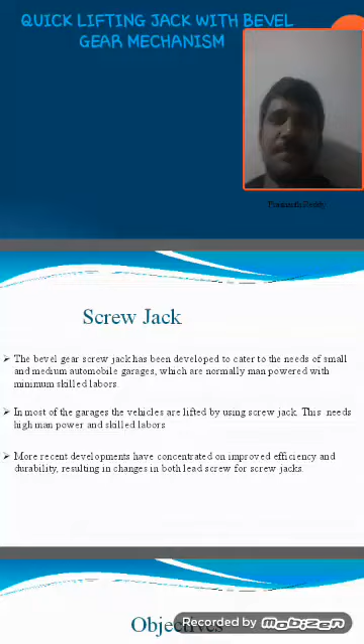Today I am going to discuss quick lifting jack with a bevel gear mechanism.

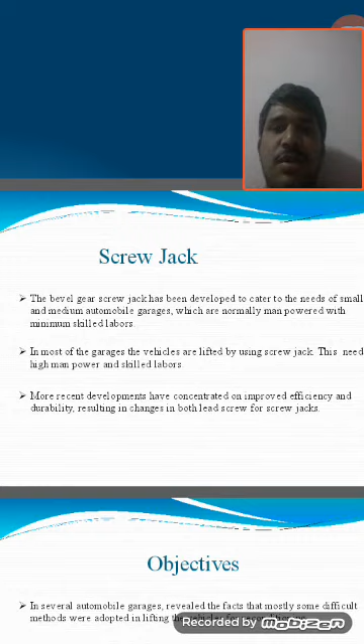First, I am going to discuss screw jack. What is screw jack? Screw jack is a type of machine element used for lifting loads.

The bevel gear screw jack has been developed to cater to the needs of small and medium automobile garages, which are normally man-powered with minimum skilled labor.

We know that all the lifting devices like screw jack, motorized screw jack, and ordinary jacks, many types are available in the market, but we want high efficiency with less effort.

From this, bevel gear screw jack will definitely achieve more efficiency with minimum effort.

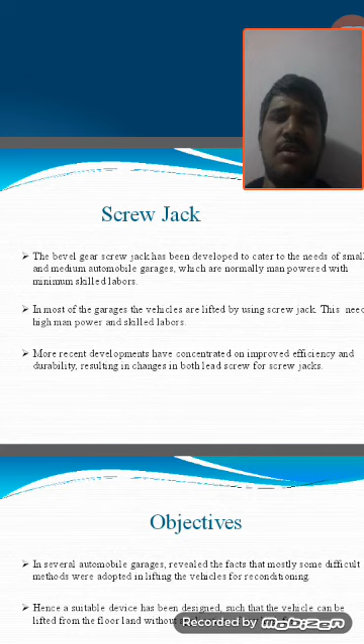In most garages, vehicles are lifted using screw jacks. Many vehicles, materials, and heavy machinery can all be lifted with less effort.

More recent developments have concentrated on improved efficiency and durability, resulting in changes in the lead screw for screw jacks. This means improved efficiency, durability, reliability, and that the screw jack is a bevel gear type.

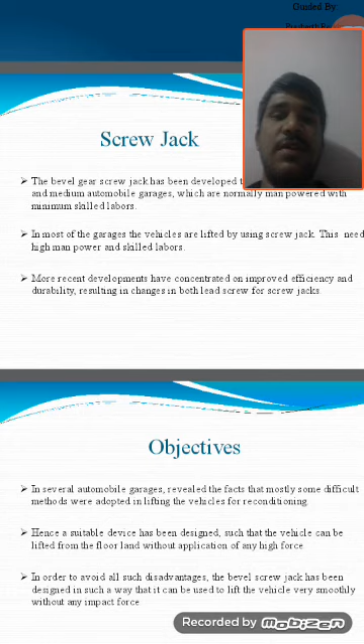With the use of bevel gear, we can lift heavy loads with minimum effort. That is the use of this.

Come to the objectives. In several automobile garages, it was revealed that mostly difficult methods were adopted for lifting vehicles for reconditioning. This means several automobile industries also use this mechanism to lift heavy loads.

A suitable device has been designed so that the vehicle can be lifted from the floor without application of any high force, meaning without heavy manual force, we can lift the load easily.

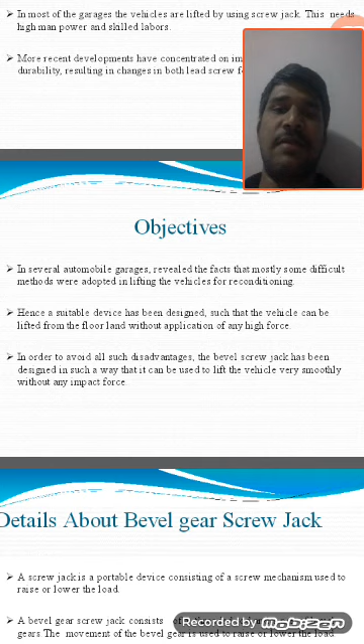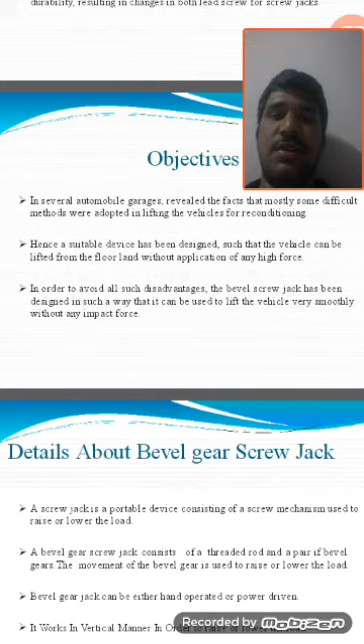In order to avoid such difficulties, the bevel gear screw jack has been designed so that it can be used to lift the vehicle very smoothly without any impact force.

Details about the bevel gear screw jack: Screw jack is a portable device consisting of a screw mechanism to lift loads. The bevel gear screw jack consists of a threaded rod and two bevel gears mounted perpendicular to each other.

In one bevel gear, the screwed rod is mounted, in which the gear and the thread mesh together to lift the load via threads.

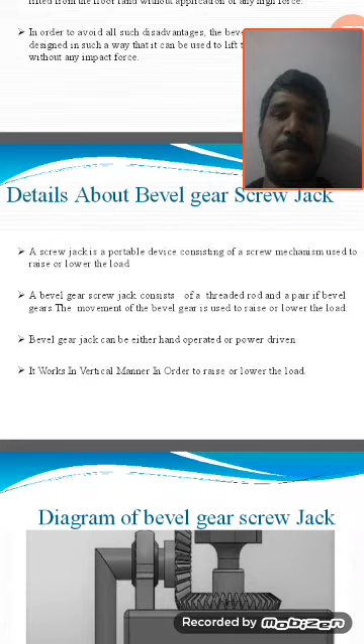Bevel gear jack can be either hand operated or power driven, handled by man or by power. With the use of electricity, we can also lift the load.

It works in a vertical manner to raise and lower the load. To raise the load, we turn the hand wheel clockwise, and to lower the load, we turn it in the reverse or anti-clockwise direction.

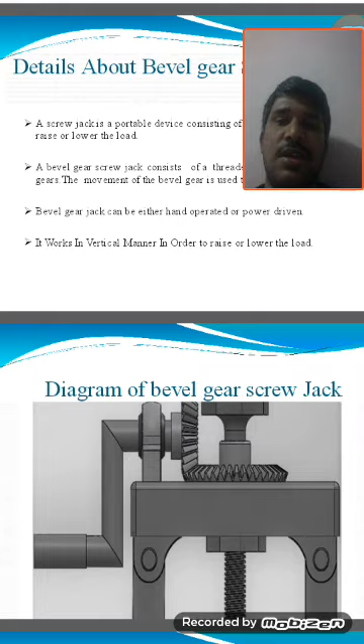This is a diagram of the bevel gear screw jack. There are two bevel gears mounted perpendicular to each other.

In one bevel gear, the screwed rod is inserted, and the end of the bevel gear is provided with a hand wheel through a bearing or plummer block.

When we rotate this hand wheel, the bevel gear which is in mesh with the perpendicularly mounted bevel gear, in which the threaded rod is inserted, will raise.

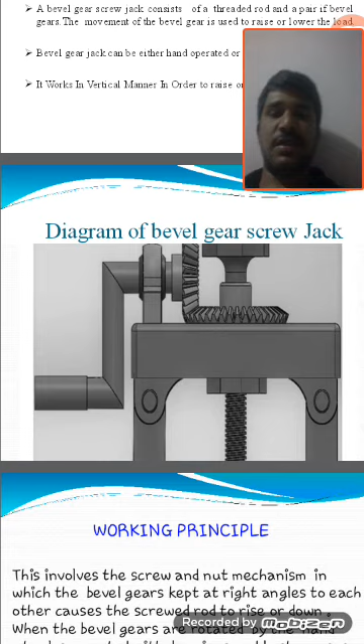If we turn it clockwise, it will raise the load, and if we turn it anti-clockwise, the load will be lowered. That is the working principle.

This involves the screw and nut mechanism in which the bevel gears kept at right angles to each other cause the screwed rod to raise or lower.

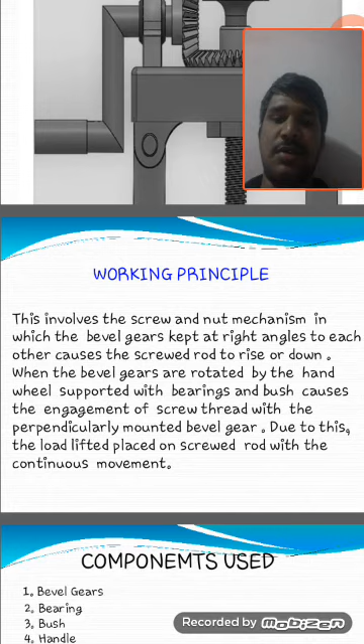When the bevel gears are rotated by the hand wheel supported with bearings and bush, it causes the engagement of the screw thread with the perpendicularly mounted bevel gear. Due to this, the load placed on the screwed rod is lifted with continuous movement.

This means, as I said, when we turn this wheel, the bevel gear is rotated. When the two bevel gears are rotated, internal threads inside the bevel gear are engaged.

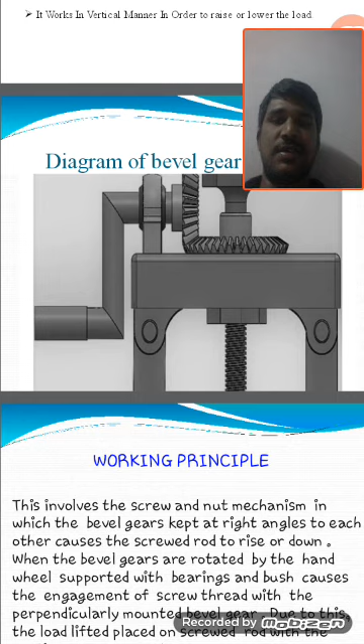This is with respect to the threaded rod, by the mesh of two threads - meaning the bevel gear and thread rod. By meshing, it will turn along the pitch, so that the distance moved lifts the load.

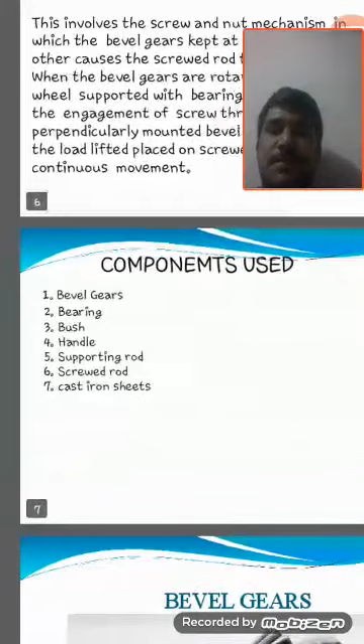Components used: the various components in the bevel gear screw jack are bevel gears, bearing, bush, handle, supporting rod, screw rod, and cast iron sheets.

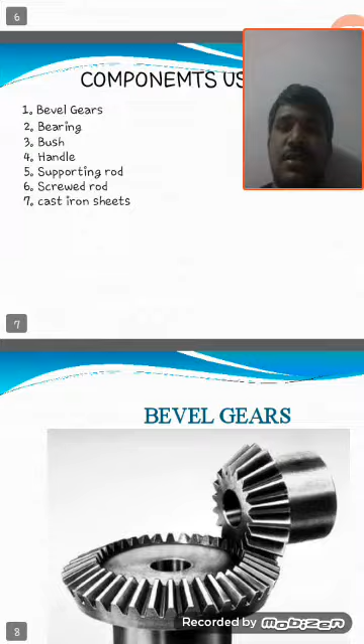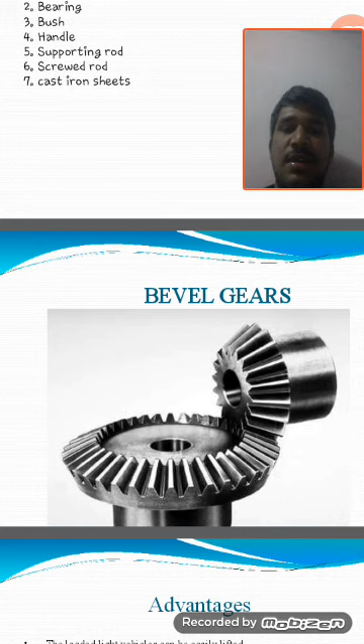We see this bevel gear arrangement, where both gears are mounted perpendicular to each other to transmit vertical power in the form of lifting loads. This is a bevel gear.

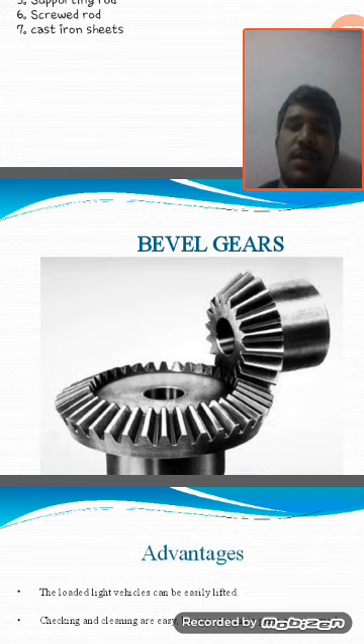This is mounted and connected to the hand wheel.

Come to the advantages: loaded light vehicles can be easily lifted. Checking and cleaning are easy because the main parts are screwed. Handling is easy, and repair and replacement are also easy.

The only complexity is in production of the bevel gears.

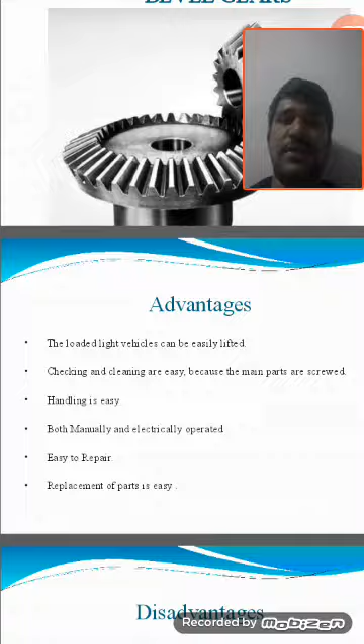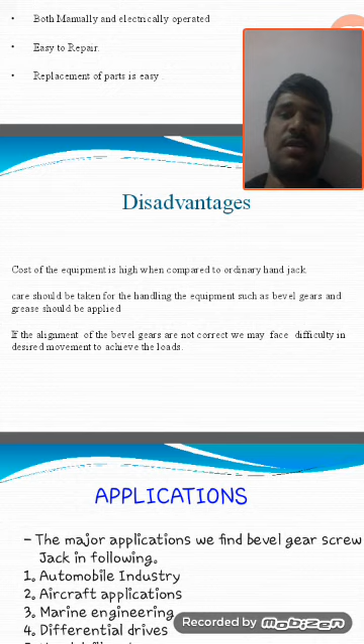Come to the disadvantages: cost of the equipment is high compared to other ordinary jacks, and care should be taken in providing grease and oil for easy movement of the gears to lift loads with less effort.

If the alignment of the bevel gear is not correct, we may face difficulty. If the alignment or arrangement of the bevel gears with the bearings, bush and so on is not correct, we will definitely face a sticky nature in operation.

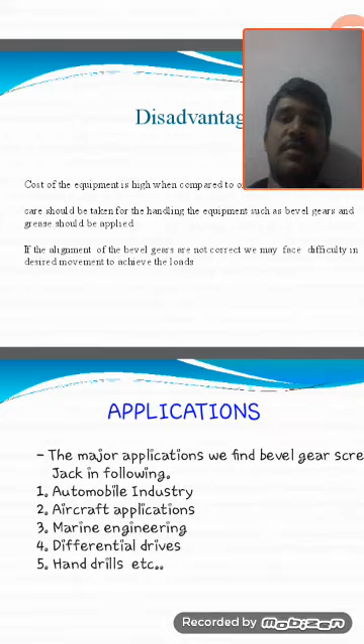It means it will get stuck, not move, and the load cannot be lifted if such difficulty is faced.

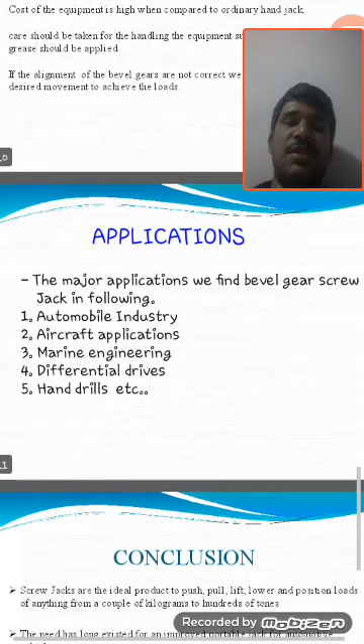Applications: the major applications of bevel gear screw jack are found in automobile industries, aircraft applications, marine engineering, and hand drills and differential drives, using this jack to lift heavy loads with less effort.

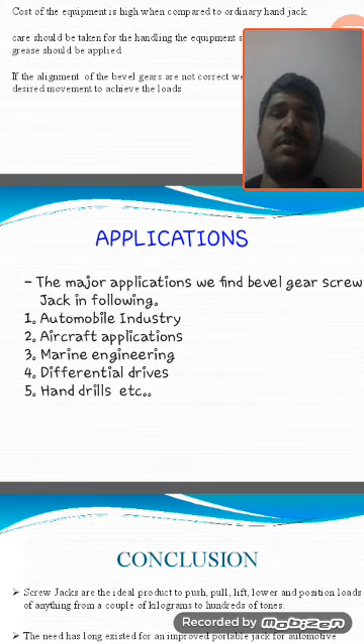By turning the hand wheel or using power/electricity, you can lift heavy loads with minimum effort.

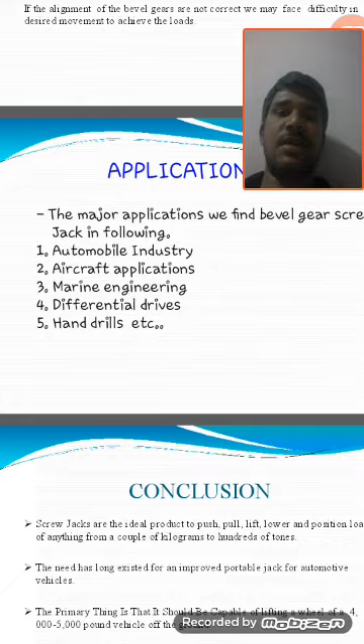In conclusion, screw jacks are the ideal product to push, pull, lift, or lower loads ranging from a couple of kilograms.

The need has long existed for an improved portable jack for automotive vehicles. The primary requirement is that it should be capable of lifting a wheel of a 4,000 to 5,000 pound vehicle off the ground.

This means, by the dimensions and arrangement provided, we can determine the lifting capability of the bevel gear screw jack.

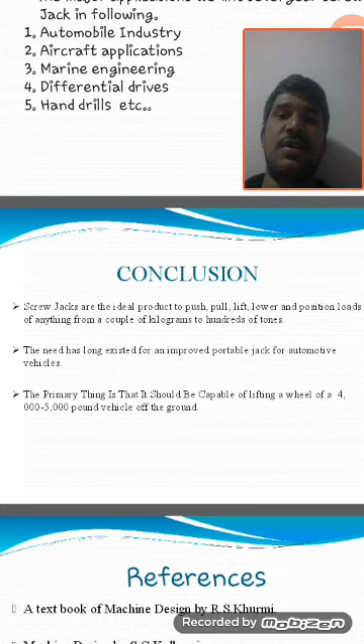If we increase the dimensions of the bevel gears and the overall arrangement, we can lift heavier loads. Otherwise, if the dimensions are smaller, we can lift less load.